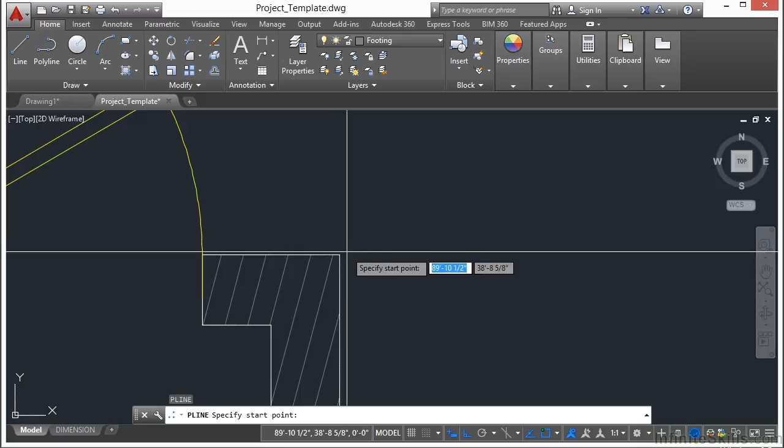Type in PL, press enter, and we're essentially just going to trace over the outline of our building. So start here, and then just snap to endpoints to our outside dimensions of our building. Another thing we could do is to just offset this outside line, but it's not a polyline right now. And then we would have to do a lot of joining and trimming. And so I feel that this is probably a simpler solution.

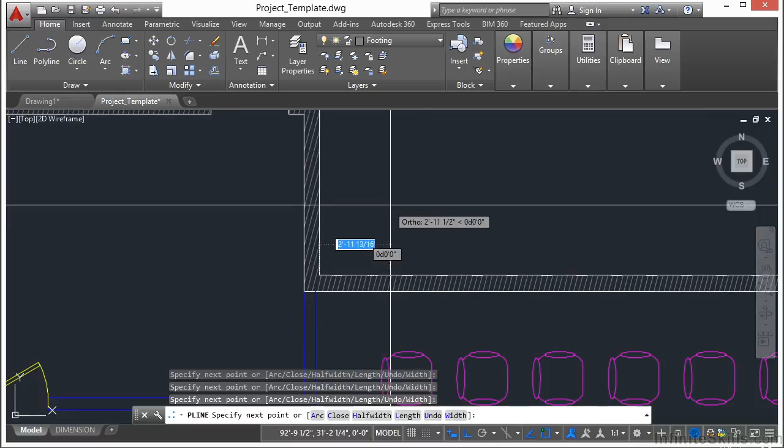Now, once you come up to this last end here, type in CL for close, and that will create a closed polyline. Now, our foundation only needs to come a few feet away from our building. So we're going to offset 2 feet, enter, select this line, and move it to the outside, press enter. Now, we don't need this line in here. Select it, right click, and erase.

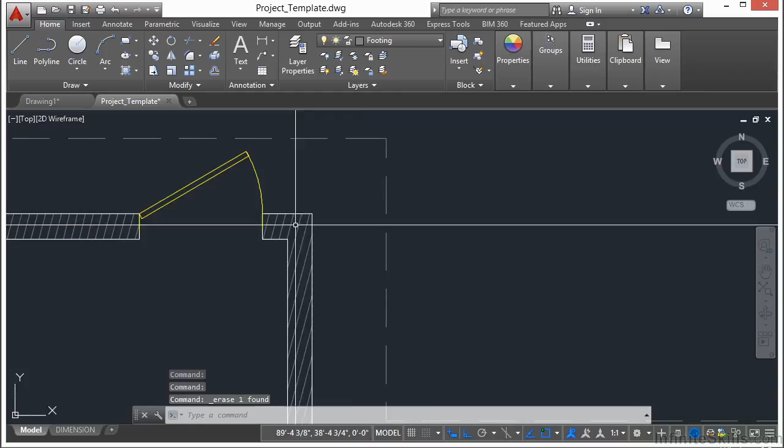So there's our building, and we have the outside line of a footing. We need that outside line because we don't want to plant over the top of it. So now that we have that, we need to create a pathway for our plants. So we need to be a couple of feet away from it. But before we start, let's switch to our plant layer. It's right there and it's red.

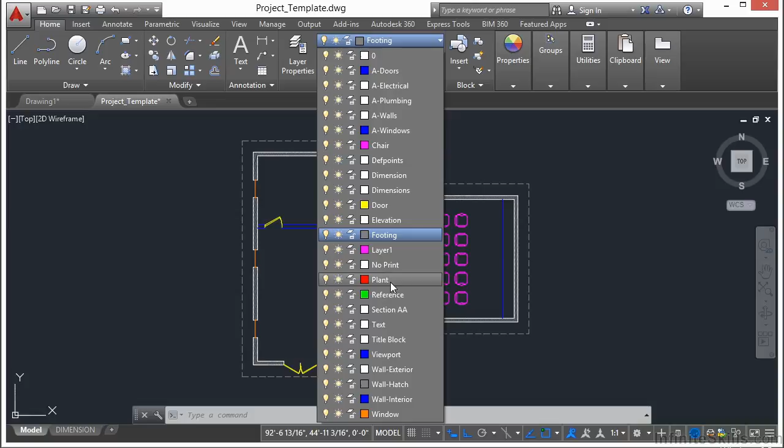Now we're going to offset. And this time, instead of typing in a distance, since we don't know what that distance is, we're going to offset through. So type in the letter T, press enter, select this line, and then drag it to here, and type in CEN for center, and select the center of that line. So this line that we just offset is going to be our array path.

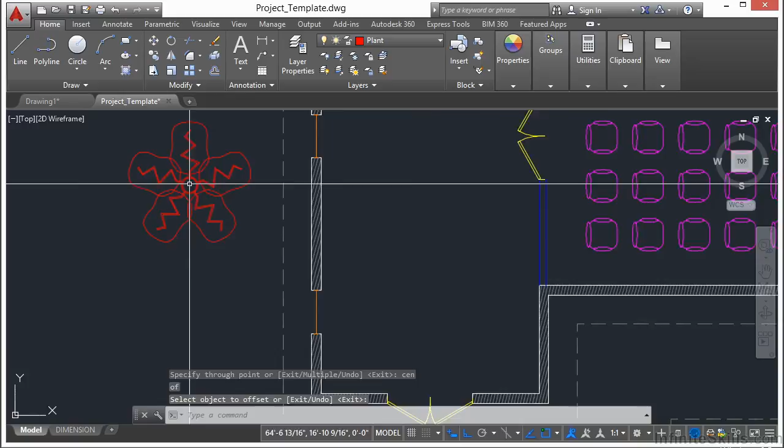Now I want to center this plant, so I'm using the move command. For my base point, typing in center, CEN, we're going to grab the center of this plant. Now type in MID for mid. I want to put it right in the middle of this line here so that we know that this plant, the very first plant, is starting right in the middle of the building.

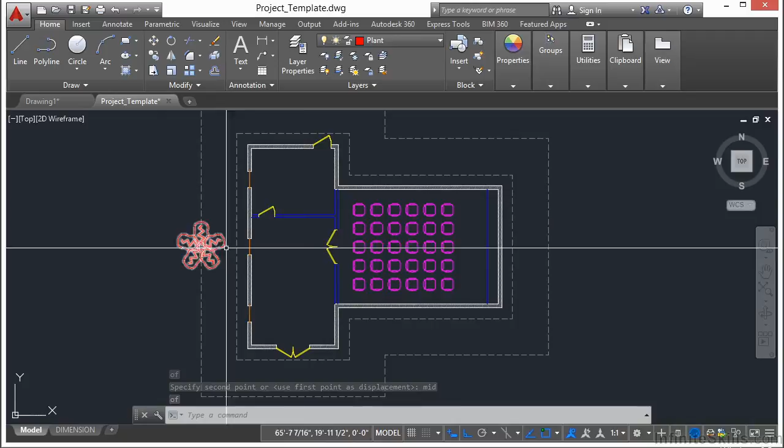So now we need to use the path array command. Select that command, start it, pick our plant, press return, pick our polyline here, and we get something really crazy. Now this happens sometimes with path array and closed polylines. Now it should work, but it happens so that it just gets caught in this loop that never ends and it doesn't know what to do with it.

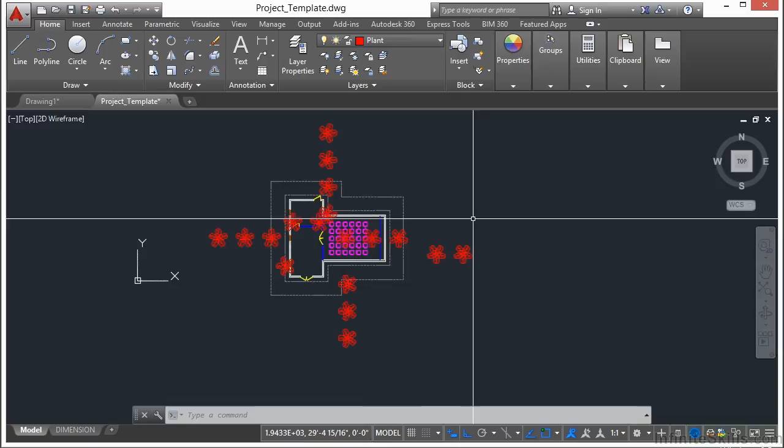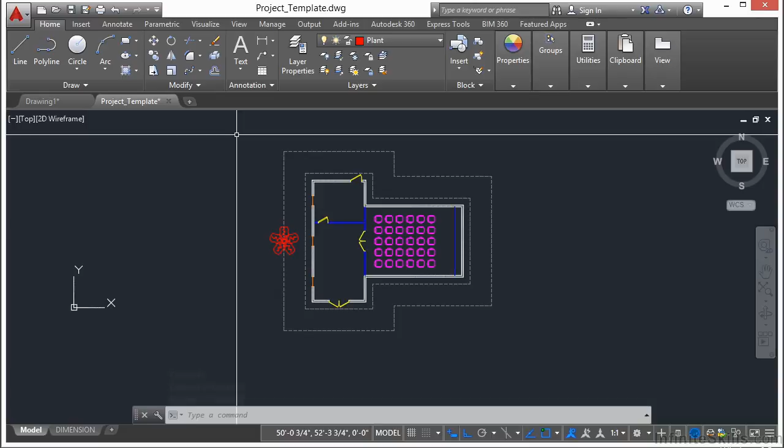So if that happens, undo, and here's a little trick. Use the trim command, select the block, press return, and pick that line. We're going to break it. That's all we did. We just broke it. So now that closed polyline is no longer closed, but it has a start and a stop point, so that now AutoCAD can handle this. And that's okay. It's going to get us close enough to what we need.

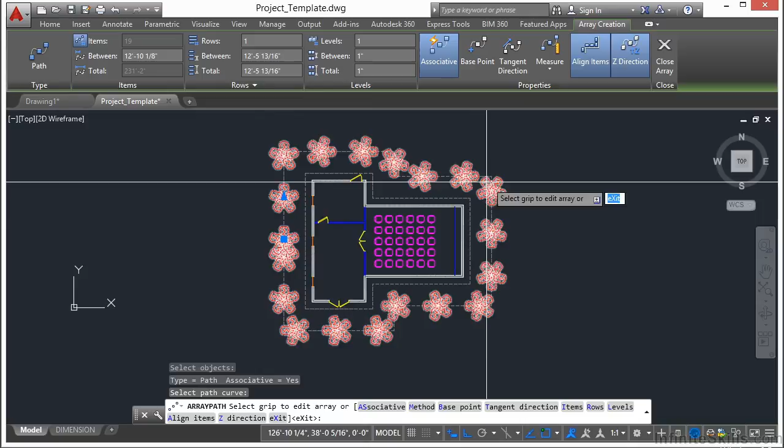So start the path array command again. Select your plant, press enter, select your pathway, and that's much better. Okay, let's say that's too many plants though. I don't like having that number of items. So we need to switch that from measure to divide. And now we can control how many items there are.

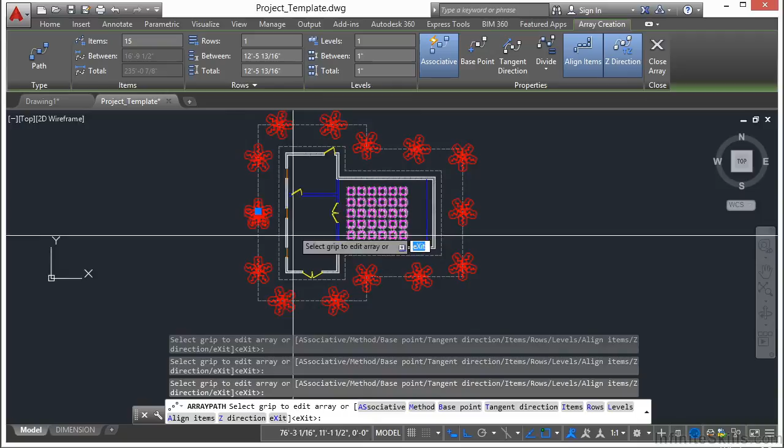Let's say 15. One of the things that it's doing is that it's putting one of these objects right at the very end, and it's kind of overlapping it. So that may be a problem you'll run into, but that's okay. We can deal with this. And this looks pretty good. It's very symmetrical. So I'm going to close array.

Now I'm going to explode the array so that each one of these are individual items. I'm going to come here to this bottom plant, right click, and erase. Now select the polyline, right click, and erase. Zoom extents, and here we go.

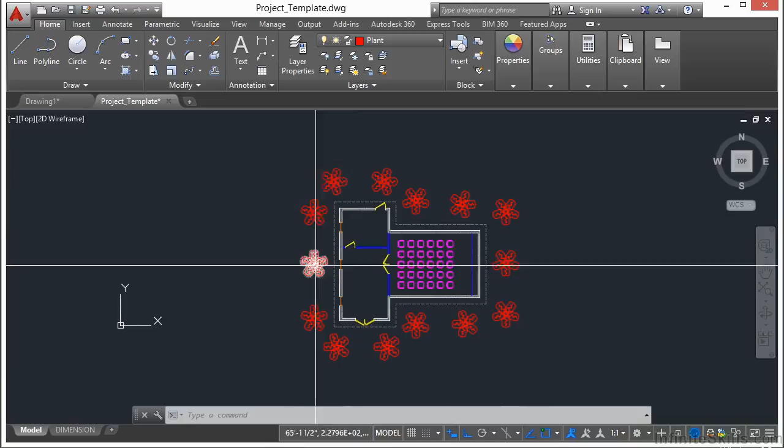So we have our building, we have our exterior walls, our doors, our windows, we've hatched the walls to better see them. We have our interior walls, a set of chairs, our foundation, and then plants that go all the way around. Now all we have left to do is to annotate and create our drawings. Our model is finished.